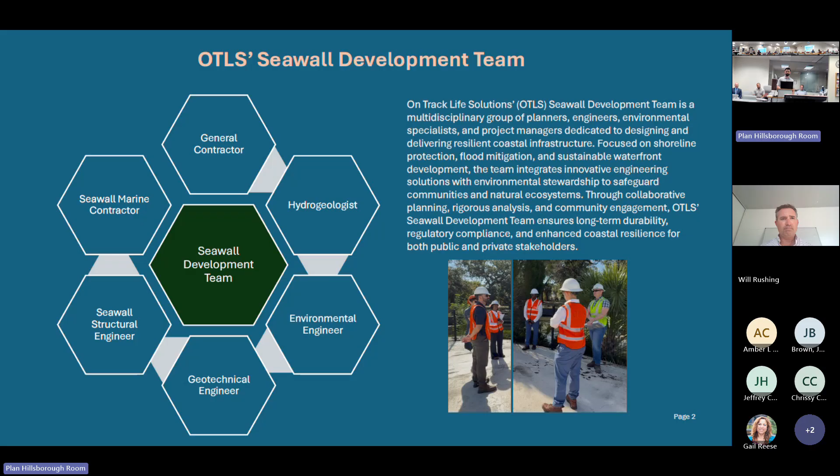Here's a little bit more about Truline, so you can see this is a little bit of a diagram. The polyvinyl forms are installed first, on the outside, and they're basically square cells that are vacant and empty. They're driven to whatever surface you need to drive them to, whether it be the rock bottom or into soil.

The vertical rebar gets staked through each independent cell. Every single one gets one, or however many the engineer designs, and that's dependent on loads, what the seawall is used for, et cetera.

And then you pump concrete through a tremie system. The concrete's pumped from the bottom to the top to evacuate the native soils or any imperfections that may be in that, giving it structural strength. It's also a less intrusive method of installing. It's a cleaner pour, all self-contained within the panels, and it offers at the end also aesthetically a very nice, smooth, flat front.

Any questions on that? So it's a vinyl face, so that does not necessarily allow recruitment of attached marine barnacles, oysters, or anything like that. That's correct, and it's no different than any of the material that you'd see, any of the corrugated panels that you see around Tampa. So you will still see barnacle growth, but what we've actually seen with Truline as well is that because of its flat front, it's allowed a lot of living seawall type structures to be affixed to it relatively easily. And we're starting to see that. We actually had a project in Miami where they're adding that along it as well. It's a living seawall type of a front, which is certainly something that can be explored as well.

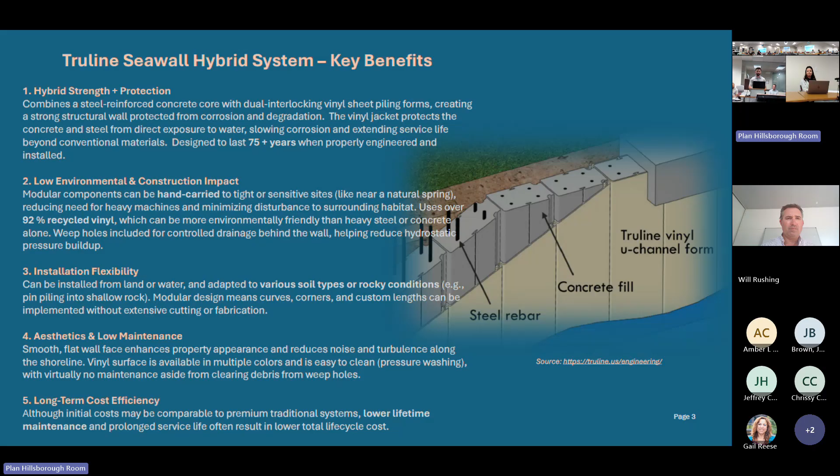We found that because of how minimally invasive the actual installation is, it ends up being the best of both worlds. So could you take out the vinyl once the concrete's poured? It gets fixed too. There's a picture of it if you go to the next slide.

Here's a bit of the installation process. These square panels you're seeing are lightweight, and they come in different lengths depending on the exposed height of the wall. They get driven in, you can put them in by hand, then drive them with a hammer on top to the specified distance. Once you form your alignment, you stake them with vertical rebar—we've seen 4 sticks or 1, depending on the structural capacity and loads the wall will experience. It gets tremie filled from the bottom to the top with concrete, and at the end you have a nice flat front concrete cap, as is traditional in most seawalls around Tampa, Hillsborough County. This is a very standard installation process.

Are there any tiebacks associated, or is it all just held up and anchored with the rebar? This particular job will have tiebacks, I believe—that's what's in the plan right now. But that's part of the flexibility Truline offers, as you can also design the wall as a cantilevered wall. Where tiebacks aren't an option, in cases with pools or something prohibiting you from driving at length, Truline can be designed as a cantilevered wall because of the vertical rebar in it, which helps resist the lateral loads pushed on the wall. There's a lot of flexibility with this product, which is why it's growing in popularity and why we like installing it—you can really adapt to a lot of different situations.

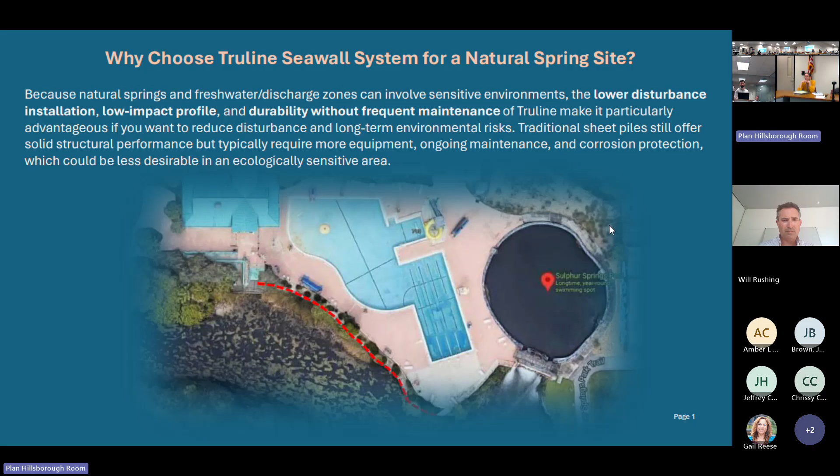address all aspects. How long has this product been out? Been just over a decade. You've done about 30 projects. As far as seawall technology goes, it's new, but one of the most notable regions is after the storms of 2018, 2019, almost the entire Daytona coast was rebuilt using Truline. That was their first big push in Florida.

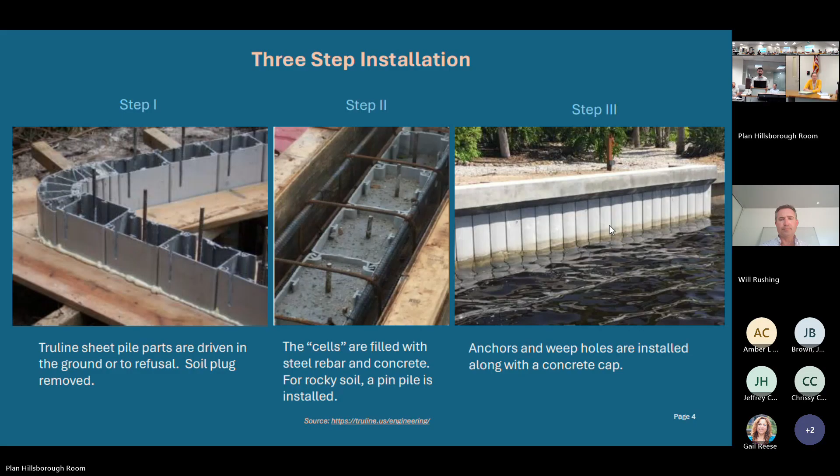Well, when we finally can vote with a quorum, thank you so much for the background. It was very helpful. Absolutely. Very much. Chair, we also have a representative for permit 26002, which is an ADA ramp down on the river, if any of you have any questions for him regarding that permit as well.

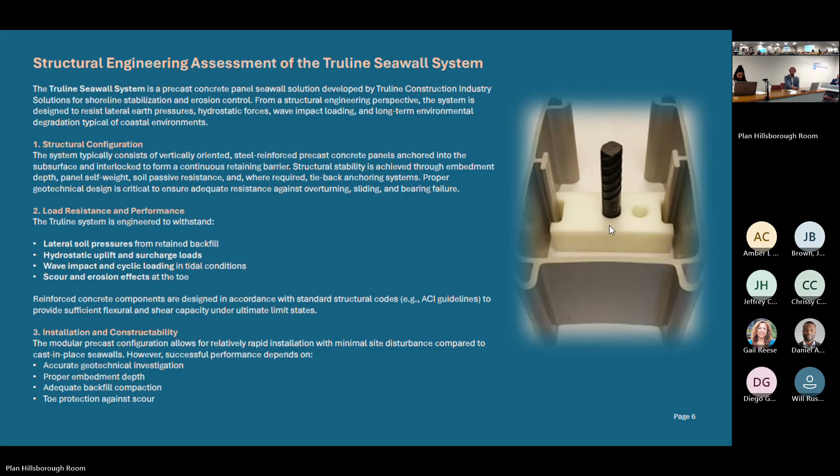Did anybody have any questions regarding the proposed ADA ramp for the Riverwalk Hotel addition? Want to pull it up, just make sure everybody sees it, knows what we're talking about. Afternoon. So my name is Merrick. I'm the project director with EMA.

We're planning on doing some ground public space renovations at the hotel. And part of it that we are hoping to get across is an ADA ramp that is going to be cantilevered off of the seawall that is adjacent to the pool deck. This ADA ramp is going to connect to the seawall and serve as a way for people to get access to the hotel, to the pool deck, and a path towards the restaurant and the amenities of the pool deck coming from the Riverwalk.

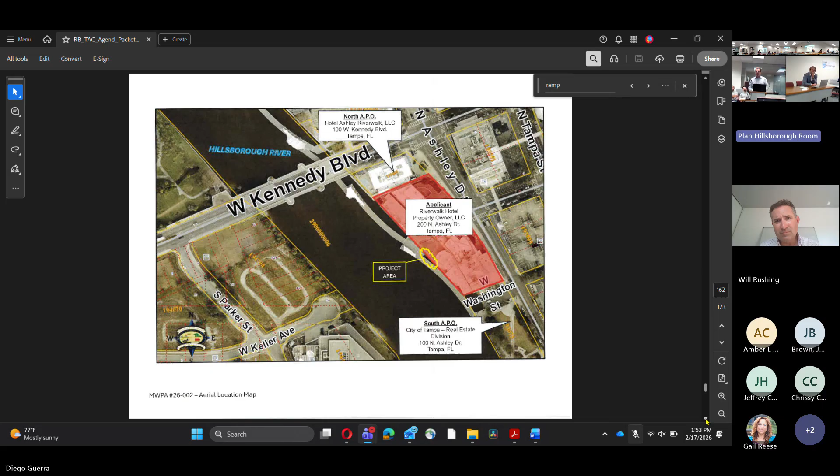Reinforced concrete. It's a cantilevered slab. And there's no physical attachment to the Riverwalk except an expansion joint that's going to be adjacent to it, where the other ramp is going up to the hotel, and so it'll be completely supported by the seawall. The highlighted section in yellow there is the ramp that I'm referring to.

So to the right of that, there's the existing ramp that turns on itself, a switchback. And then we would be taking it off of that landing in the middle and heading to the south, or the left. That would incline up with a landing in the middle and then connect onto the top of the seawall, which would be the top of the ADA ramp. That way you get access directly into the circular part of the hotel we call the Rotunda, which is a restaurant slash bar.

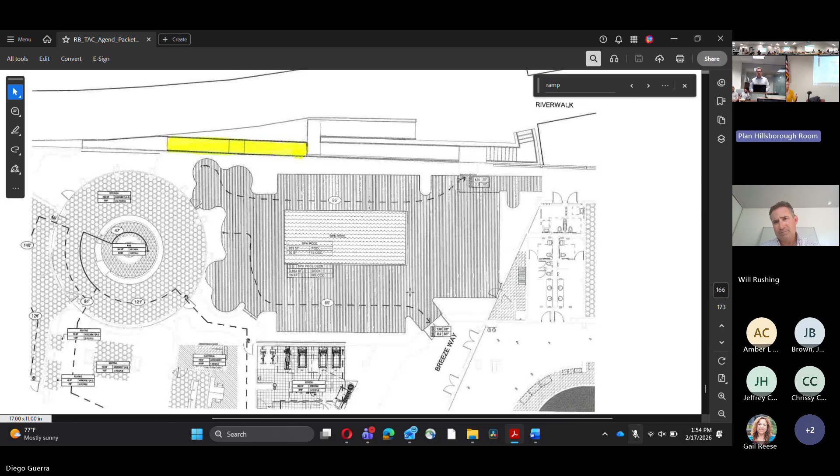And that's it, pretty straightforward, pretty simple. It's going to look very close to the Riverwalk: the finishes, materials, railings, everything. So it'll look like it's an extension of the existing ramp that's there now. So this right now is the existing City of Tampa concrete seawall. This is the edge of the existing Riverwalk. And this highlighted area where the ADA access ramp is proposed is just a gap between the Riverwalk pedestrian elevated walkway and the seawall of the hotel.

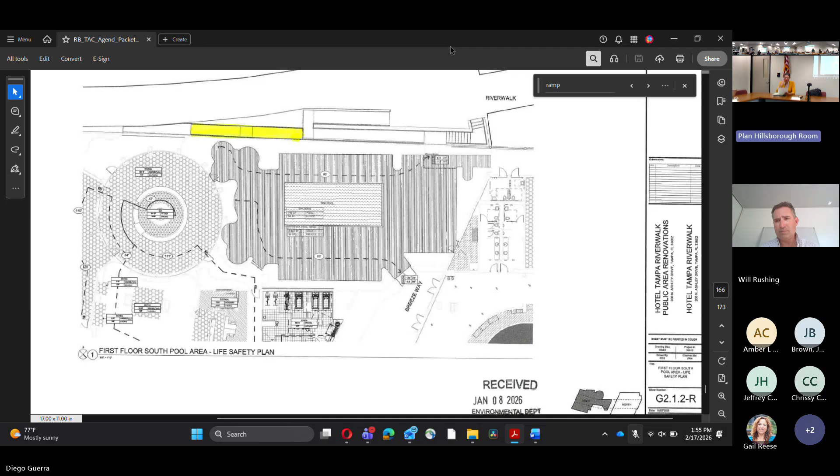Anybody have any questions? Okay, well, thank you, Merrick, for that additional background. The only comment I have is item F in the consistencies for Tampa Bay minor work permit application number 23-058. That one is actually on the Alafia River, not the Hillsborough River, so that one can actually come off.

All right, well, since we don't have a quorum, we will have to table the election of the officers, the approval of the previous meeting minutes, and all of the consistency recommendations until the next monthly meeting. Thank you all for being here. Sorry we were unable to vote, but we'll get these.